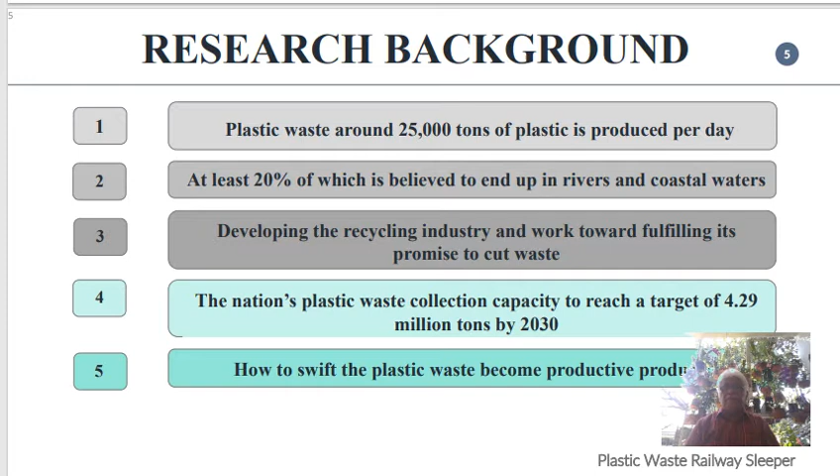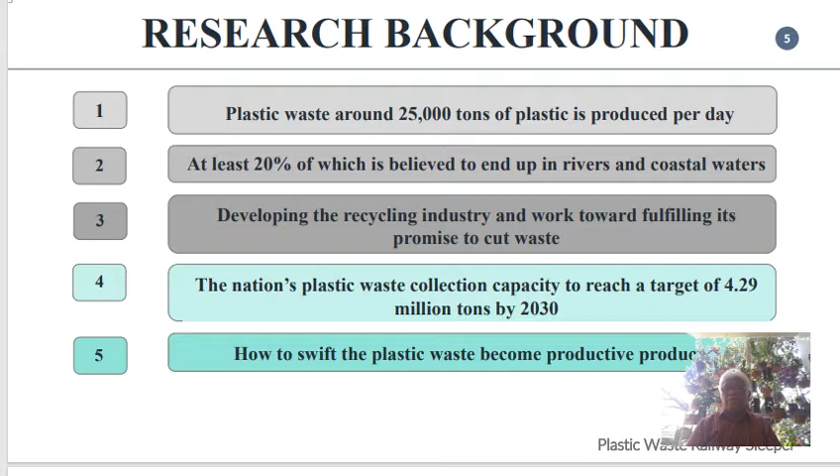coastal water. Number three, developing the recycling industry toward fulfilling its promise to cut waste. Number four, the Indonesian national plastic waste collection capacity to reach the target of 4.29 million tons by 2030. Number five, how to switch the plastic waste to become a productive product.

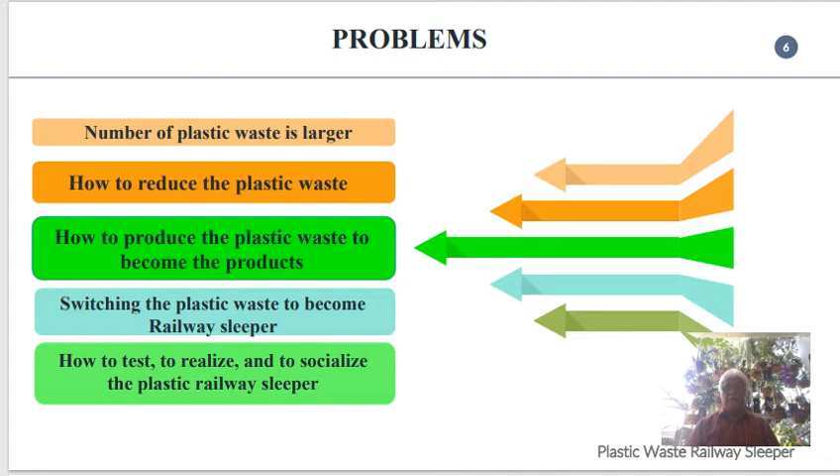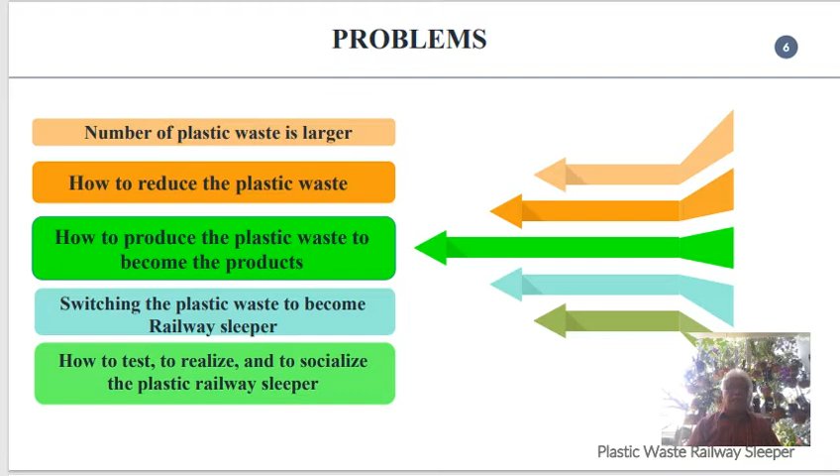The problem is the number of plastic waste is very large. Number two, how to reduce plastic waste. Number three, how to produce the plastic waste to become marketable products. Switching the plastic waste to become railway sleeper. And number five, how to test, to realize, and to socialize the plastic railway sleeper.

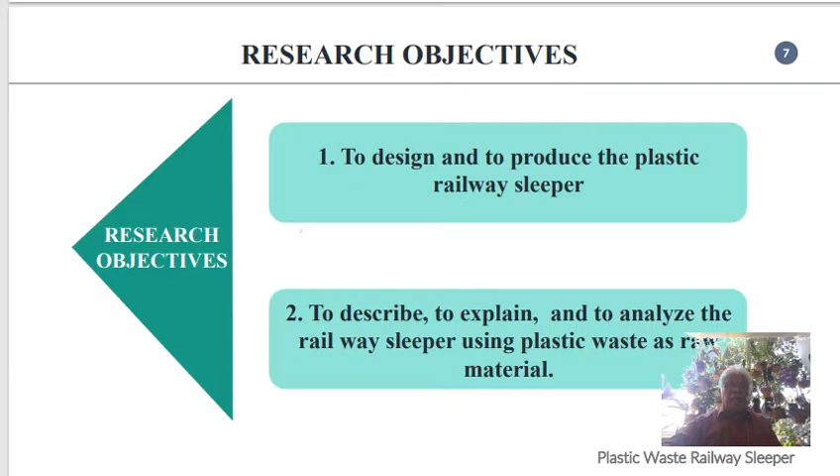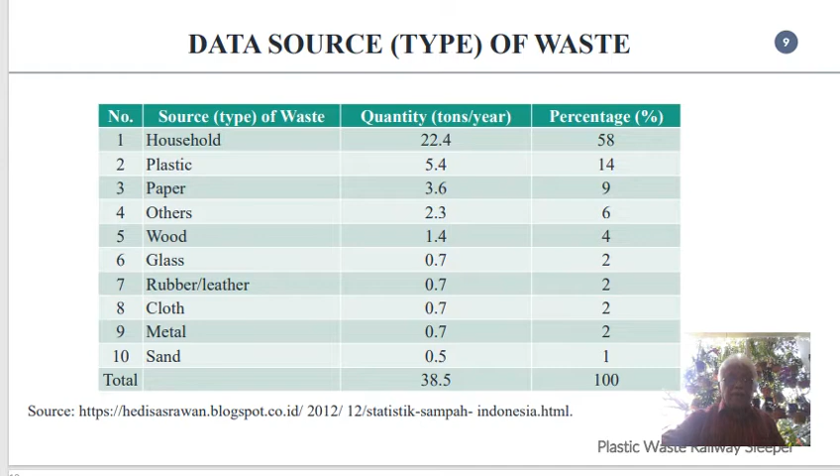Data source of type of waste. Number one is household, about 22.4 million tons per year, and this is about 58%. Plastic, 5.4 million tons per year, is about 14%. Paper, the quantity of the waste of the paper is 3.6 million tons per year, is about 9%.

And the other ones, 2.3, wood 1.4, glasses 0.7, rubber and leather 0.7, clothes about 0.7, metal 0.7, and sand 0.5 million tons per year, and the total is 38.5 million tons per year.

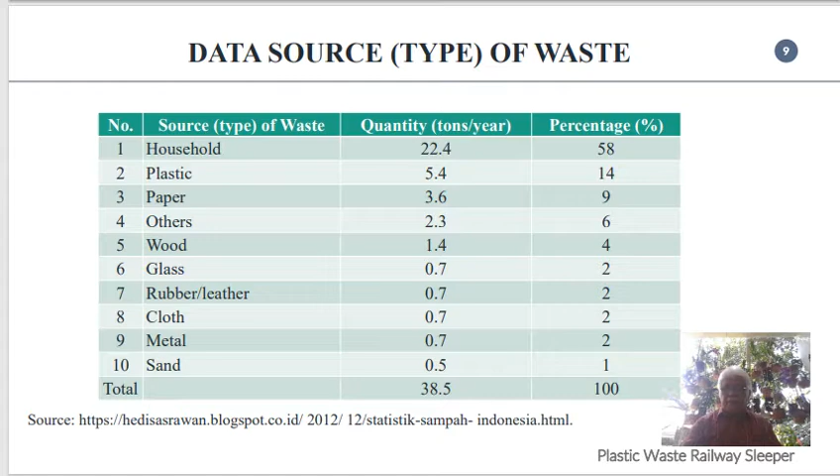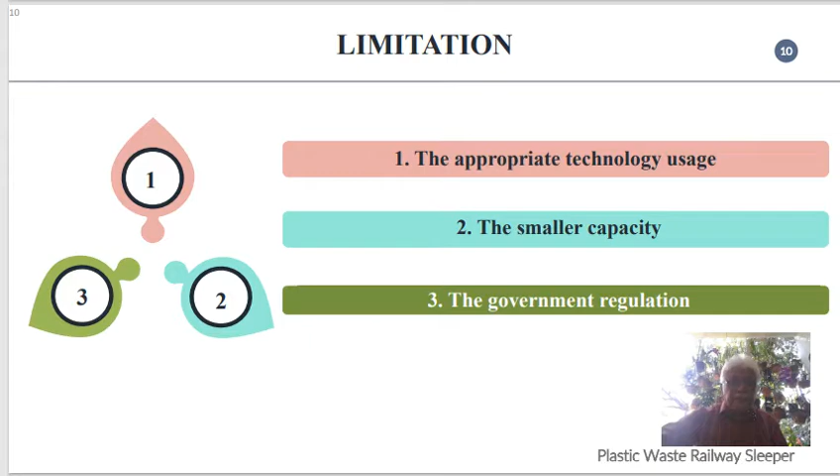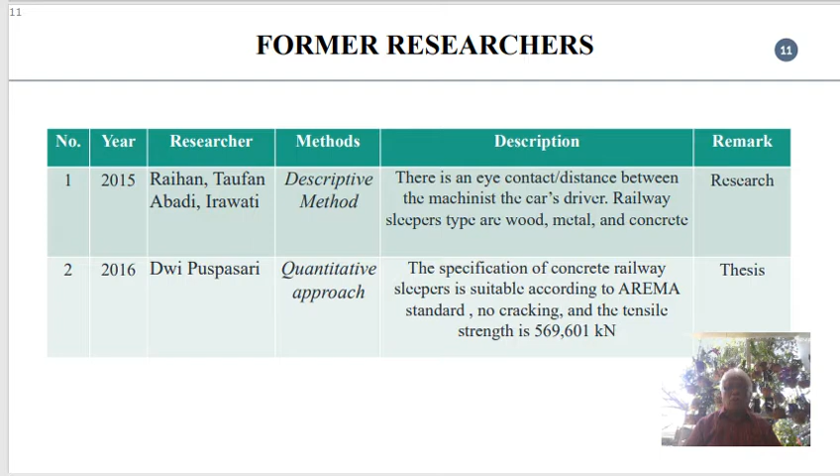And number two, the research in the year of 2016, the researcher is Dwi Puspasari. The method is quantitative approach. The description is the specification of concrete railway sleeper is suitable according to AREMA standard. No cracking, and the tensile strength is 569.601 kilonewton.

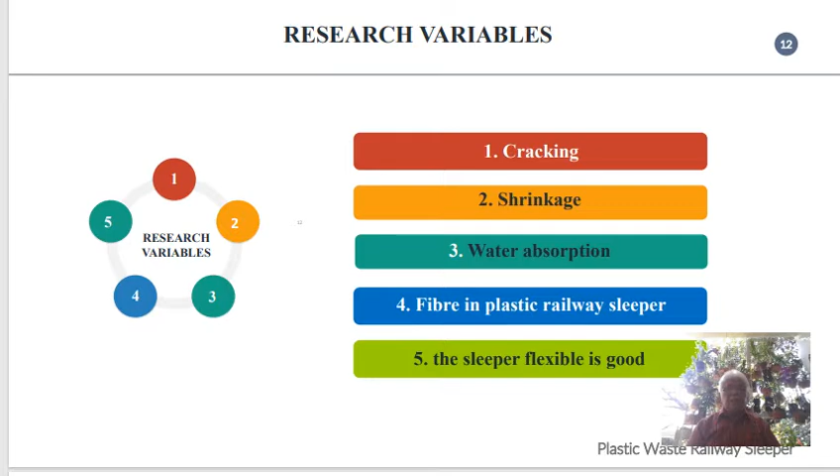Our research variables are, number one, we would like to observe the cracking propagation, and the shrinkage of the plastic waste railway sleeper. Number three, we observe water absorption in the railway sleeper. Number four, we observe the fiber in the plastic railway sleeper. And number five, what about the flexibility of the railway sleeper?

The literature study. The definition: plastics are organic chemical compounds of high molecular weight that have a structure resulting from the repeated linking together of small molecules called monomers. The resulting long-chain molecules are polymers. Number two, there are two types of plastic.

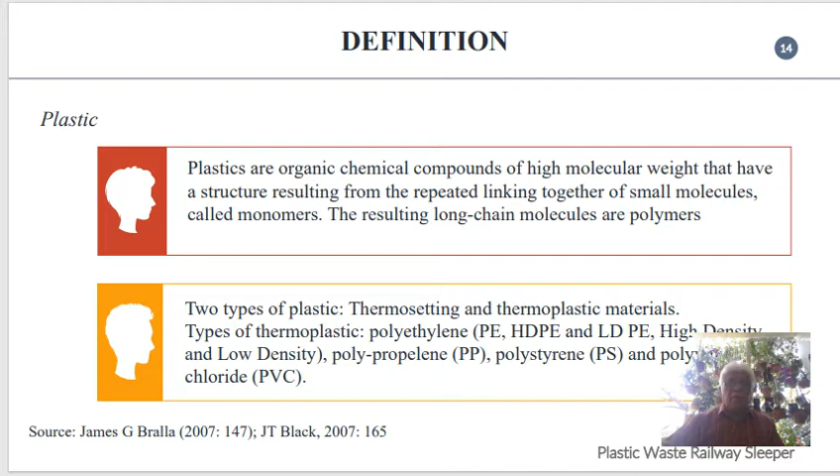Number one is thermosetting material, and then thermoplastic material. The types of thermoplastic are polyethylenes, high density polyethylenes, low density polyethylenes, polypropylenes, polystyrenes, and polyvinyl chloride or PVC.

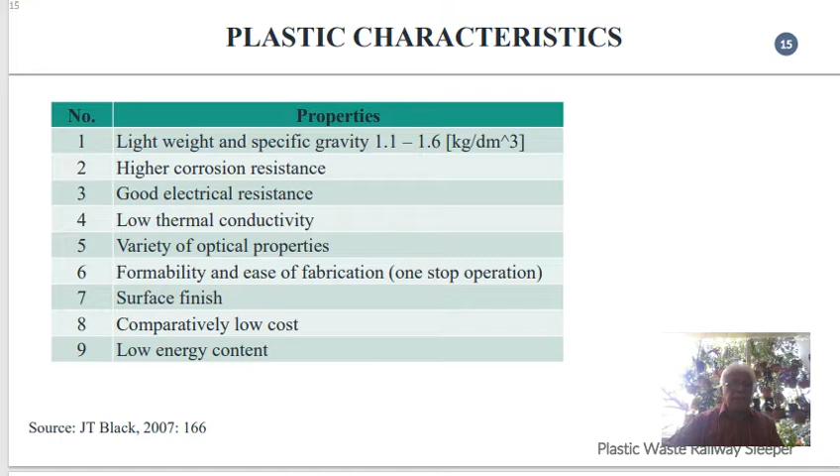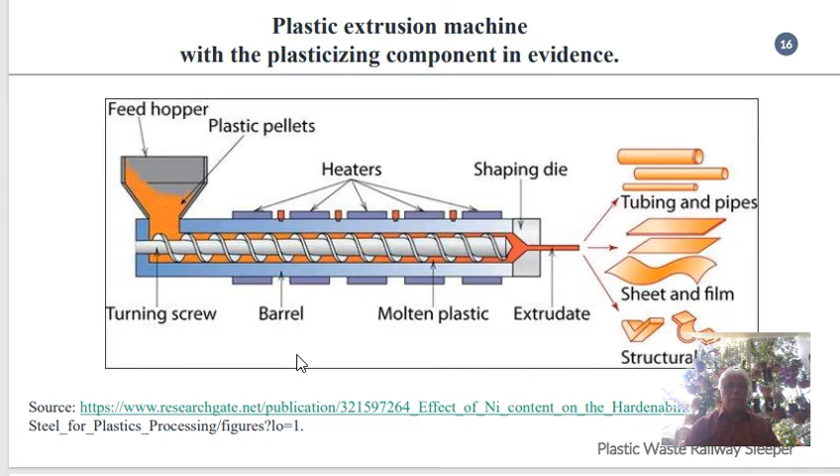This is the equipment, the plastic extrusion machine with plasticizing component in evidence. The products, we can see tubes and pipe, then sheet and film and structural parts. There are the feed hopper and plastic pellets, heater, shaping die, turning screw, barrel, molten plastic, and extruded product.

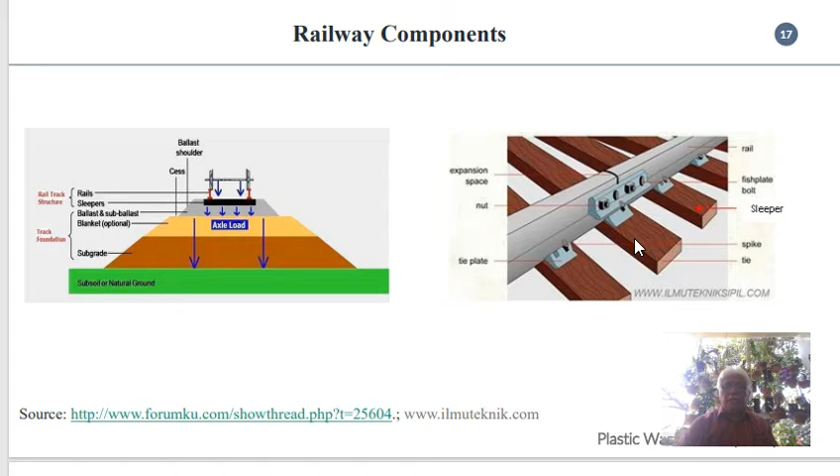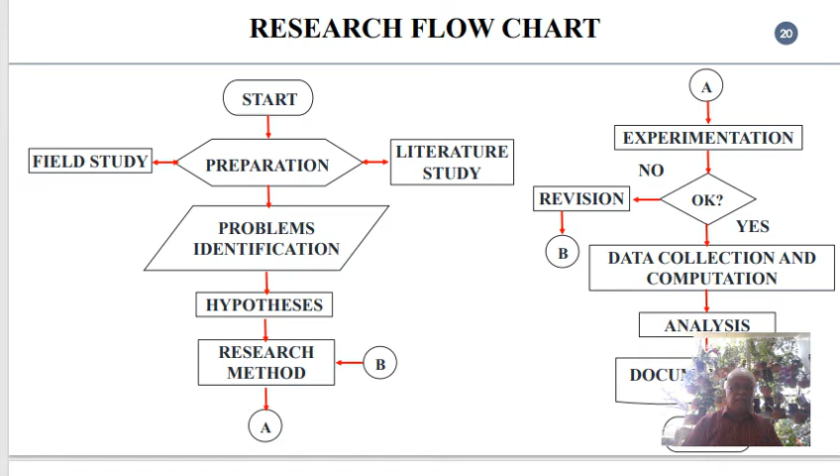This is the component of the railway. You can see in this picture, this is the connection between the metal railway and the railway sleeper. The research method: our research method applies a qualitative approach. This is the flowchart of our research, starting from the research till the documentation.

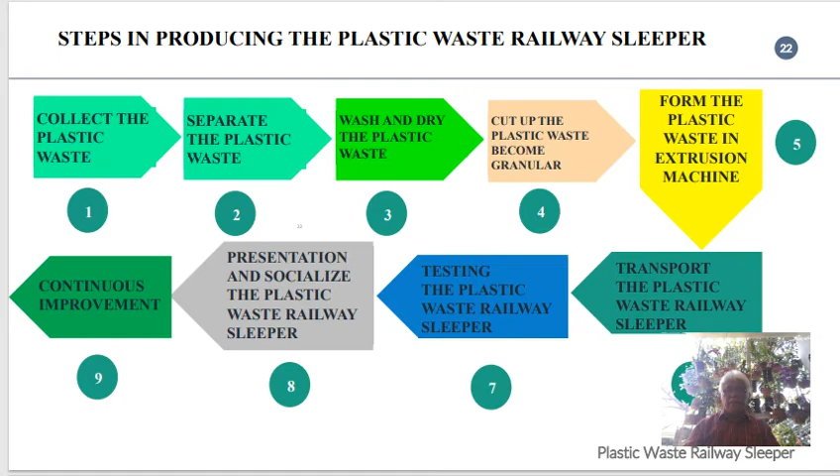Step number 6 is transporting the plastic waste railway sleeper to the location. Step 7 is testing the plastic waste railway sleeper. We test using the bending testing, and then the tensile stress testing. Then we present and socialize our observation about the plastic waste railway sleeper, and then we try to continuously improve our research.

This is the step in producing a plastic waste railway sleeper. We look for the plastic waste in the big market, outside of the big market, and then we separate it between thermoplastic plastic and thermosetting plastic, and then we cut it up to become granular, and then we form the plastic waste in the simple extrusion machine. This is the product, the plastic railway sleeper. Then we test it. This is the bending testing material.

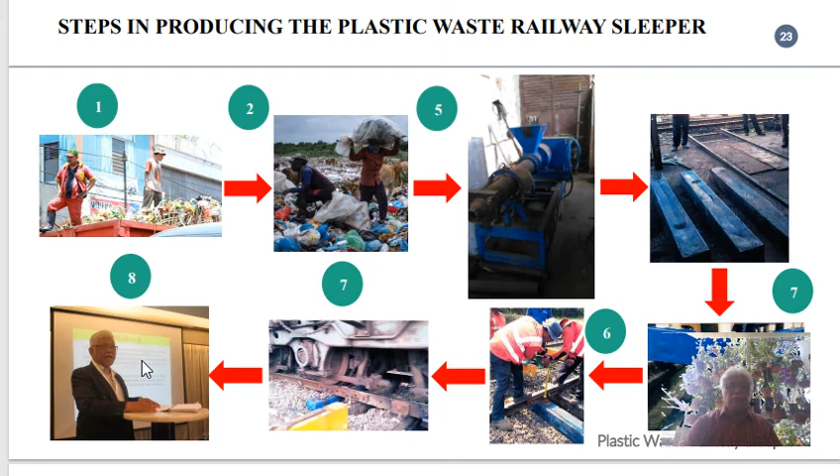Then we install the plastic railway sleeper in the real railway station. Then we test it in the critical section of the railway road, up to 6 times. Then we socialize and present this research in a national seminar and try to introduce it to an international conference.

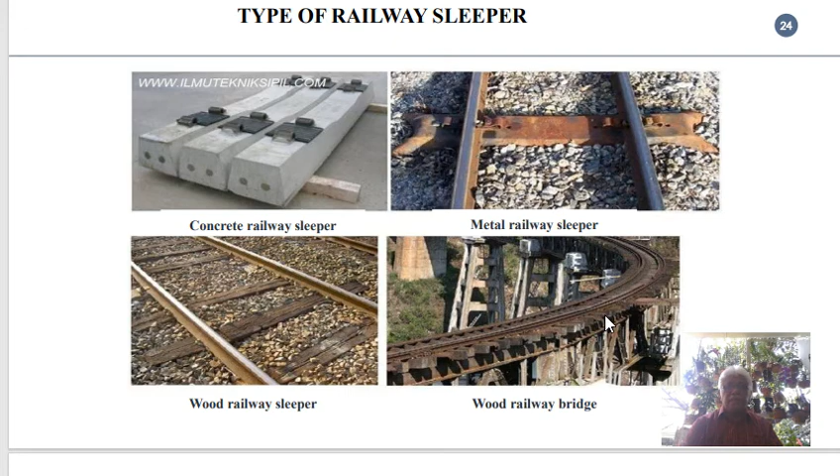This is the type of railway sleeper. This is the concrete railway sleeper, then the metal railway sleeper, and then the wood railway sleeper. This is the bridge, a wood railway bridge.

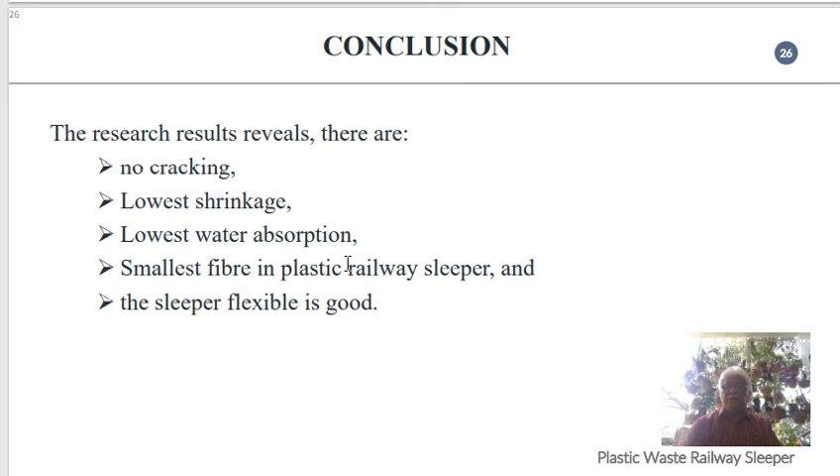The conclusion of this research paper: the research result reveals there is no cracking, the lowest shrinkage, the lowest water absorption, and small fiber in the plastic railway sleeper, and lastly, the sleeper flexibility is good enough.